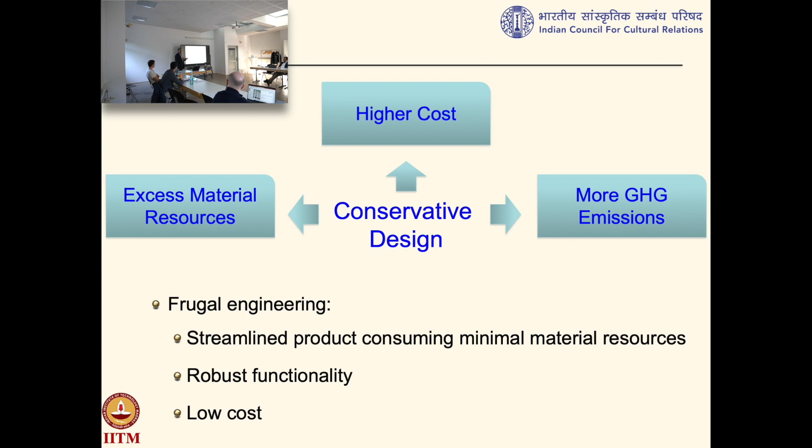Engineering is composed of numerous constituents, right? You have design, materials, manufacturing, quality control. This is just a crude decomposition of the main engineering. But any activity that leads to any engineering can be frugalized. I'm going to talk about some of these today.

So this entire frugal innovation movement has matured into something called frugal engineering. There are many companies and other entities doing this without knowing about it. I've come across many researchers and companies showing products which are very good in functionality, consumed little resources, and are affordable. It's just amazing to see that.

What this new discipline tries to do is systematize engineering to make these things possible from scratch, so that under one umbrella we can collect all kinds of techniques and methodologies which can make this possible. Some of these are already available - we just have to use them in a different way. For others, we'll have to look for newer methods.

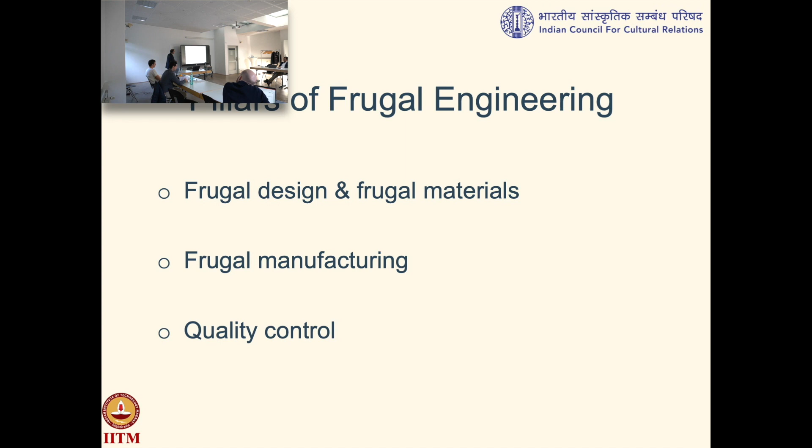So under all of this, one way of attacking this is through what is called the factor of safety. I think my engineers here will agree with me - we always use a factor of safety for designing any product. Mechanical, civil, take any product, it has a factor of safety built into it. Classical design is based around a reliability approach, or the factor of safety approach.

The factor of safety, as the name suggests, was started to give a feeling of safety for your product. So the nuclear industry might have a factor of safety of 5, and aerospace industry typically works with around 1.3 to 1.5. The lower the factor of safety - unity, value of 1 - basically means you're operating at failure load. A higher factor of safety means you're operating well below the maximum failure load possible.

You don't want to go beyond that. Typically, higher factors of safety are recommended so you can be more certain about your design and what you're creating. But this also results in using more materials, and it doesn't make the product frugal. So the first thing is to go for a lower factor of safety, typically 1.3 to 1.5 maybe, but this will depend on the product and the sector concerned.

A factor of safety which is good for one area might not be good for the other. For the nuclear industry, I told you, you have something like 5. So 1.5 is kind of very risky for the nuclear industry - you'll have to think for an appropriate value there.

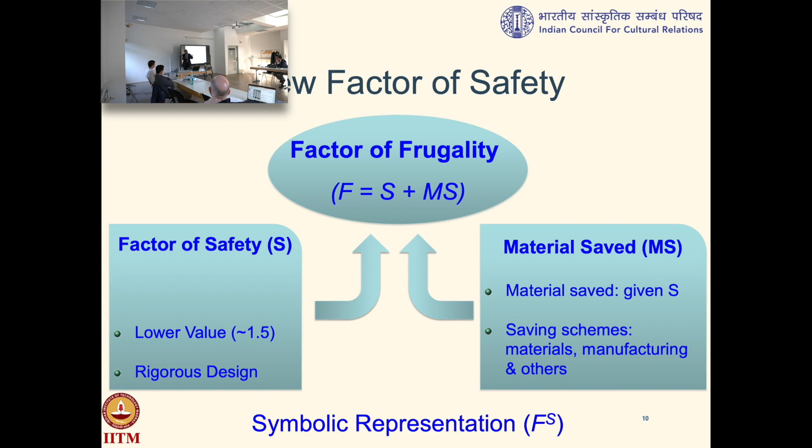A symbolic representation is F raised to S. So F is the factor of frugality, and S is the traditional safety factor. It is subsumed, taken inside your factor of frugality.

The example I will use is a shaft, a mechanical shaft. This is like a workhorse of engineering. You use it in so many places, either to transmit power or to convert rotary motion to linear motion. It has many applications, but it's also easy to understand how this design works and how the factor of frugality approach works.

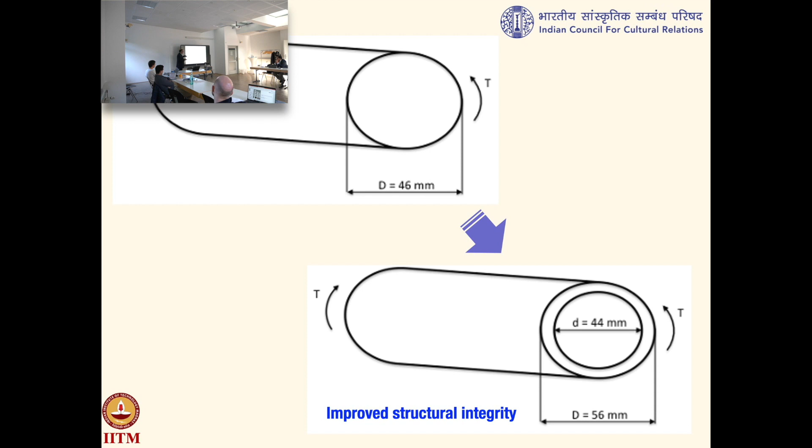Engineers will know this: for a given factor of safety, a hollow shaft that you see here has better structural integrity compared to a solid shaft. So for the same factor of safety of say 1.5, I have these two designs, but this also saves more material and it is better structurally.

So the way I do this for a shaft is, I start with a very low safety factor, as you can see here, 1.5. My baseline design is a solid shaft. The next stage is to see, within the 1.5 family, what other design I have which will save yet more material for that design.

So here I select a hollow shaft. So for 1.5 safety factor, I go for a hollow shaft, which, other than saving material by coming from a low safety factor, saves yet more material from the hollow feature.

Once you fix this part, you go to manufacturing. Now in manufacturing, either I can take a solid bar stock and bore it, machine it to make it hollow, in which case you are wasting material, or I can do something called extrusion. The nearest thing that comes to extrusion is your toothpaste in the morning.

When you squeeze it, that's the process of extrusion. So you can actually extrude metals. But the beauty here is you're not wasting material. I can use the right volume of material to extrude and get a hollow shaft without wasting any, and I'll get the required finish and all the other properties I want. So by doing that, I've actually saved more material here by not going for machining.

And finally, what if I go to the junkyard? I'm crudely putting this as junkyard. Junkyard disassembly is now a big business. There's a lot of engineering that goes into it. All your sustainable products have to be disassembly friendly, so they easily disassemble, or have other features built in, so you can reuse them, either directly or by melting them and using it in a different form. This is like a big industry itself.

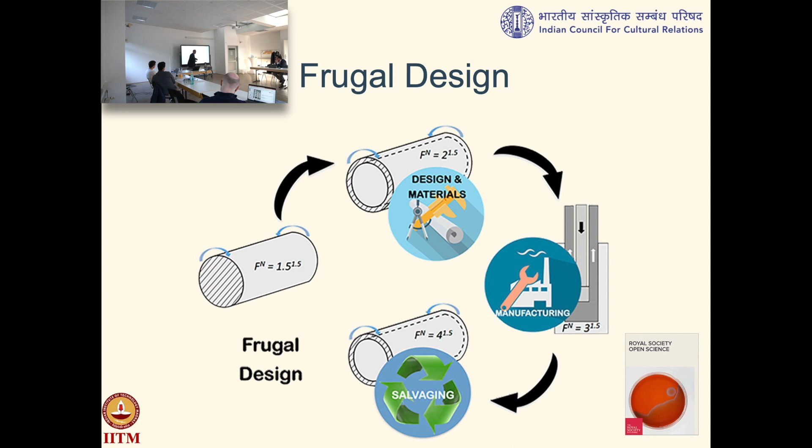So we start with a factor of frugality of 1.5, which is just your initial safety factor, but I end up with 4. The way this has to be interpreted is, for a given low safety factor, my factor of frugality has to be as high as possible. I can make this artificially high by taking a higher safety factor, but remember that is not our goal—we want to save material to make this frugal and better. So you go for a lower safety factor. For a given low safety factor, the higher my factor of frugality, or F, the better.

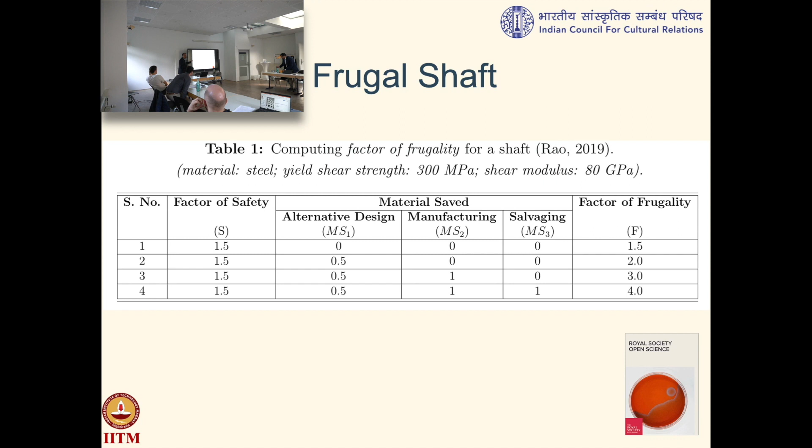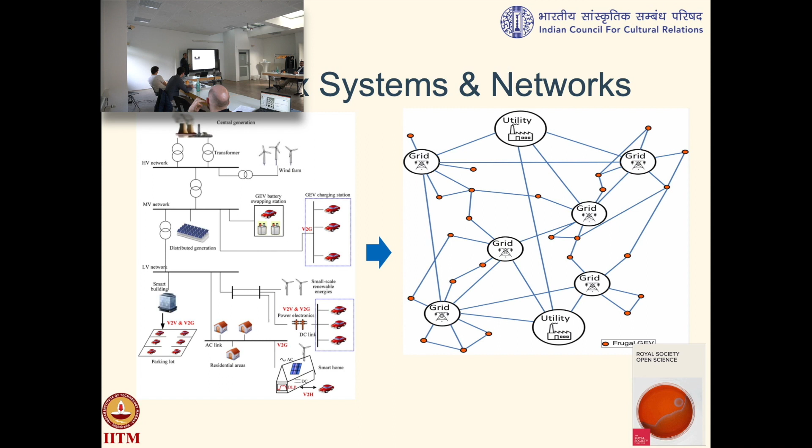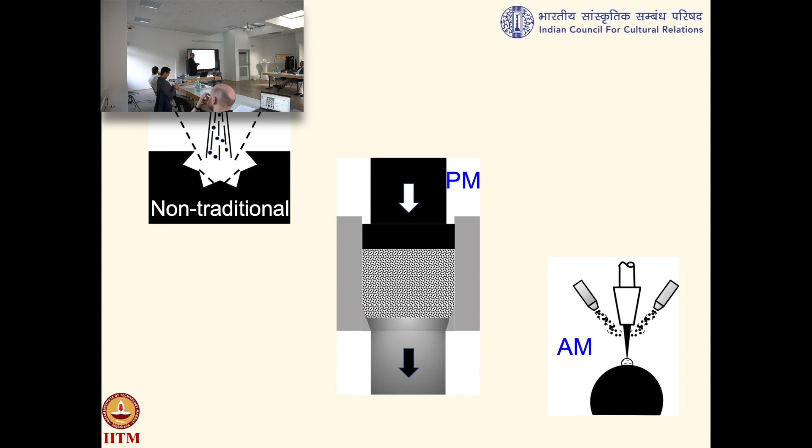This is where we come to the topic of frugal manufacturing. Again, from a factor of safety perspective, what we are trying to do is save more on waste. So I need minimal waste, or maybe zero waste, but I also want to make a product that is the best in its properties, like surface finish, integrity, residual stresses, all of that. You get very good properties but with lesser wastage, and also low cost manufacturing processes. So you're going for a minimal number of low cost manufacturing processes to give minimal waste with the best quality for your product. Ideally, I want one process, low cost, giving zero waste, and giving me all the features, characteristics, tolerances, surface quality that I want in my workpiece.

Now there are some case studies here. One is superplastic forming, which is often used to make critical components for the aerospace industry. Here you see a part, something like titanium, and you have a high pressurized gas that forms it and gives it the shape. This is heated to a certain temperature so it becomes manufacturable, and then the gas actually shapes this against the die shown in yellow. Typically this is followed by heat treatment to give the right microstructure, as we engineers call it, to give the right properties into the workpiece.

Now, this is not frugal because you have an extra process here. So one way of making this frugal is to combine the heating or retrofit your main superplastic forming die with heating, so that you can do both in one and save costs in the process. This is one way of doing it.

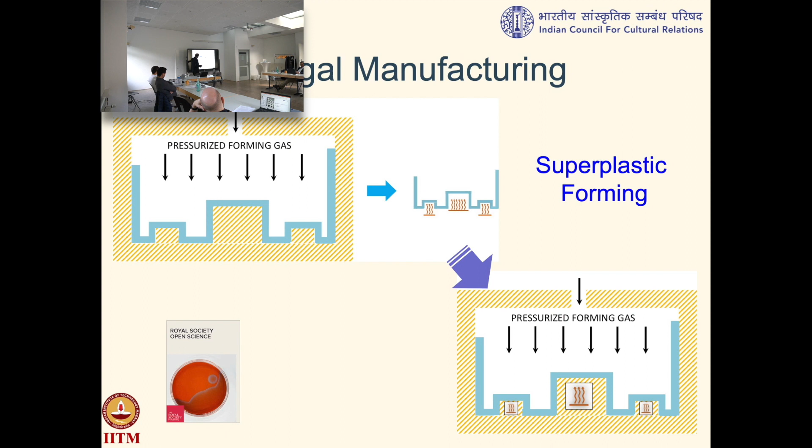The other example is from metal cutting. Typically, when we have to shape something, like we want a flat feature here for this workpiece, you take a couple of rough passes, remove a lot of material, and then take the finishing pass to get what you want. Then we do something called shot peening, where you aim a lot of high projectile steel ball indenters at the part to give residual stresses in the subsurface region. Residual stresses are very important, by the way.

All products have this. What you see for a product is only the finish, but all manufacturing operations leave residual stress in the component, and this affects the functionality in a big way. Many times you can improve the longevity of a product by just giving it the right residual stresses.

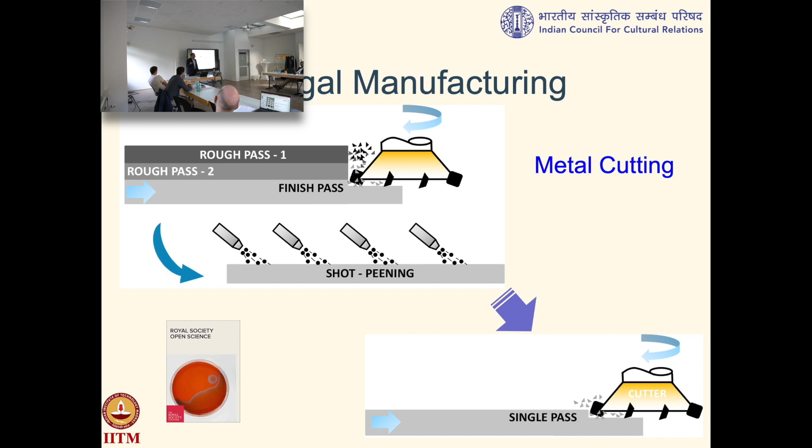Now, one way to make this frugal, avoiding these two rough passes and shot peening, is to do what's called high-speed machining. I can machine at very high speeds in a single pass, removing very little material. Speeds vary for different materials, and for aluminum, many times it can be about kilometers per minute. These are very high speeds, but it gives you a very good finish and the right residual stresses.

For such a case, you can see that you're saving about 90% of material wastage just by opting for high-speed machining. And this is doable. Most machine tools now have this feature of high-speed machining. Different materials have different high-speed machining regimes, but you can program your machine tool for that.

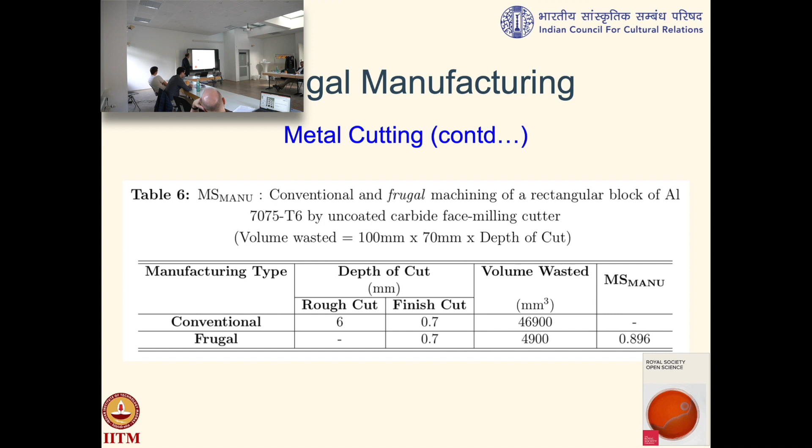The last example I'm giving is from additive manufacturing, and this is a component made from titanium, Ti-64. Ti is titanium, 6% by weight aluminum, 4% by weight vanadium. It's a very popular aerospace, marine, bio alloy. In fact, I'm having a Ti-64 drill bit in my tooth right now. My doctor accidentally left that while doing a root canal, and I think I'm a living example that it works well and is perfectly compatible with the body.

But manufacturing Ti-64 is a nightmare. Many times the materials that are very good in terms of their properties are also very difficult to manufacture.

From a 3D printing point of view, you put a powder of Ti-64, and then you have a laser beam that is moved and scanned in different layers, and in the process, it sinters portions of it. Sintering is like bonding the particles together to make a part out of them. But if you use it the way it is, it gives you a microstructure which is columnar. You can see the stripes here. We call that a columnar microstructure.

A columnar microstructure is not good. It gives, in engineering parlance, what is called anisotropy—your properties vary with direction. You don't want that. So first, you have a columnar structure, and secondly, the composition here is something called alpha prime plus beta. You want alpha and beta phases, but you get alpha prime, which is acicular, and you don't want that. So by using it the way it is, I get a columnar grain structure, and I get the wrong alloy to start with. Later, I might have to heat treat this to get the right grain structure—meaning I want to avoid the columnar structure and make it equiaxed, so I get isotropic properties. Sorry for my engineering jargon, but I think that's a bit important for this presentation.

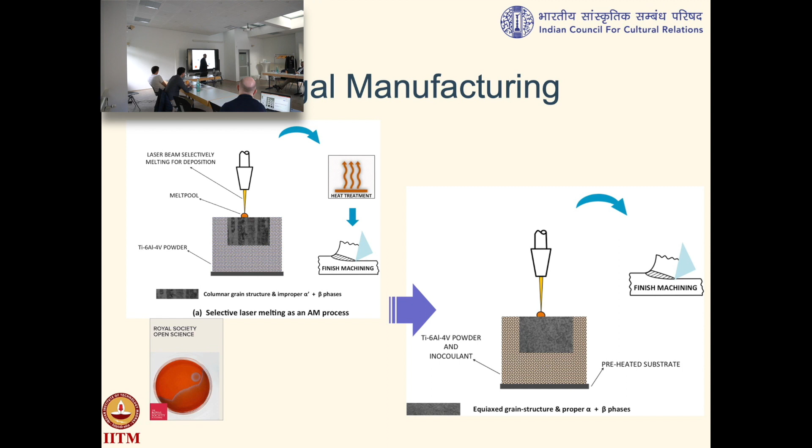That's more important here, and this can be used to design the new generation of frugal machine tool systems. We want machine tool systems which are intelligent to take decisions on when they are wasting more material, and what kind of properties they are imparting to the workpiece. This is doable now with artificial intelligence, big data, along with machine tool technology. You can combine these things to design different structures of a machine tool with factor of frugality, and use all these tools in Industry 4.0 to make this possible.

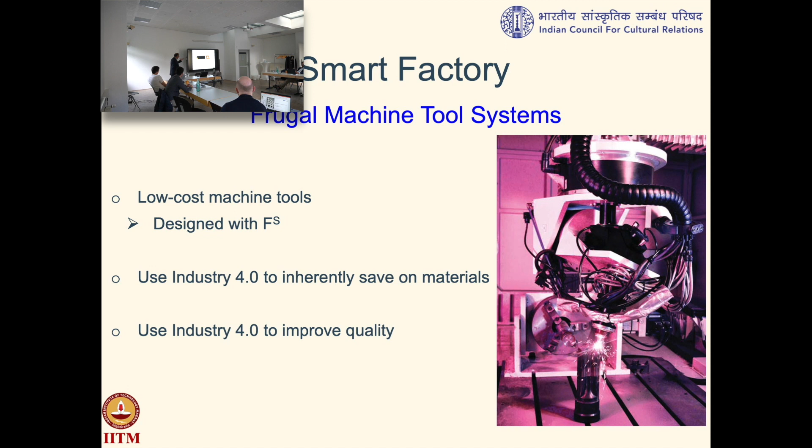This is a frugal machining cutter designed by my student. She's doing her PhD with me currently, and we've used frugal machining principles to make a cutter which is, I would say, kind of smart. It avoids something called chatter. Chatter is a self-excited vibration, a very bad vibration phenomenon to have in manufacturing. It affects the property, damages the machine tool, and might also damage the operator.

So it's very problematic to have, and you have to avoid it. We've tried to build in features in the cutter to avoid that. That also saves on waste, reduces cost, and helps in getting the right properties. By avoiding chatter, I can also avoid a lot of other parasitic mechanisms that are inherent to machining.

She's currently on a scholarship with Purdue, finishing up this work at Purdue University. She'll be joining, I think, soon in mid next year, hoping to graduate out soon. This is a longitudinal turning cutter that we are planning to—we have patented the idea—and hopefully looking forward to industry and other collaborations to take this to the next level.

Lastly, the beauty of the factor of frugality is that it's a single number. You can nicely control it with the different features that it offers, to get what you want, as opposed to a reliability-based approach to design, which is stochastic—it depends on numbers. You want more data, it also tends to be more expensive. There are advantages to it; I'm not saying it's totally bad, and I'm sure factor of frugality also has its own disadvantages, but this can be tweaked to work better and better with time.

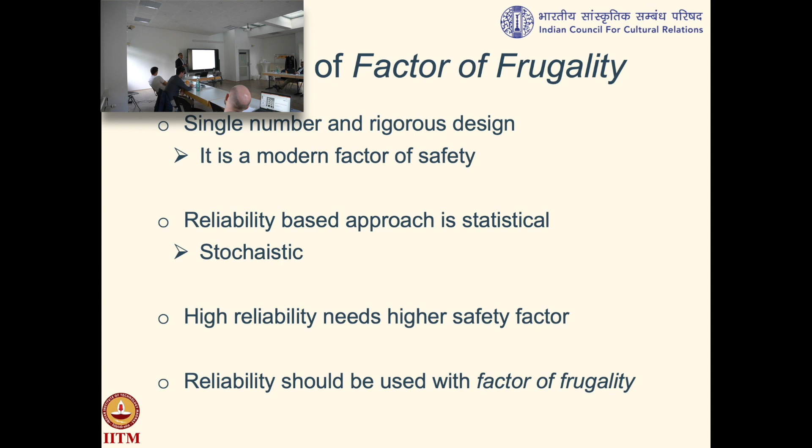And this will help you to build in sustainability—that's the beauty of it. You can engineer that. I can actually impact how much material I'm consuming, the cost, the functionality that I want. A lot of these things can be done with frugal engineering. A factor like the factor of frugality will also help you compare products—within a family of products, I can just compare the F value and figure out how sustainable they are, and it also tells you it's affordable, frugal, and good to the world.

Caveats for the factor of frugality: like I told you, it varies with the sector. There is no one number or one safety factor that works for all. We have to make the decision in the area where we are working, and accordingly tune the factor of frugality to your sector or application—constraint on resources.

This whole thing is based on advanced frugal products, the frugal products seen in more engineering applications. We build them with an artificial constraint on resources—that's the definition of an advanced frugal product. You build it with an artificial constraint on resources, and use science, engineering, or any relevant knowledge area to design it systematically from scratch. By doing that, you're actually building in sustainability issues and sustainability credentials into it—that's one nice thing about it.

Rigor is very important here, because with lesser materials, our models and designing have to be very rigorous—there is no room for errors. And the human factor, of course: in applications where human life is at stake, like nuclear or healthcare, one has to use these things with a certain amount of research and due diligence. It's doable, but you should not hurry through it—take your time, get a good product out so that this helps in all ways possible.